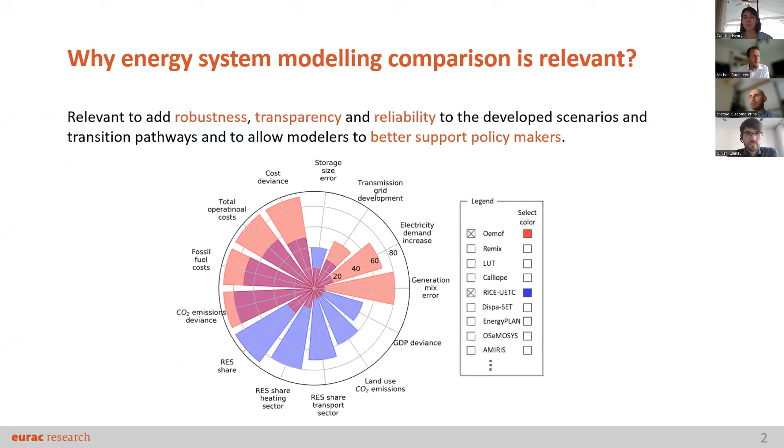So this is my presentation on classifying and comparing energy system models. Why is comparison of energy system models relevant? It is important to add robustness, transparency, and reliability to the results of the modeling, and in this way to better support policymakers. Before starting, I would like to give some definitions which I will use during this presentation.

The first is about the word framework. I will use the word framework to describe a modeling environment with a general formulation which is replicable under different assumptions and input data, and which is characterized by certain mathematical formulation and structural boundaries. A model, an energy system model, is a specific implementation of an energy modeling framework. A scenario result is the result of an energy system model run.

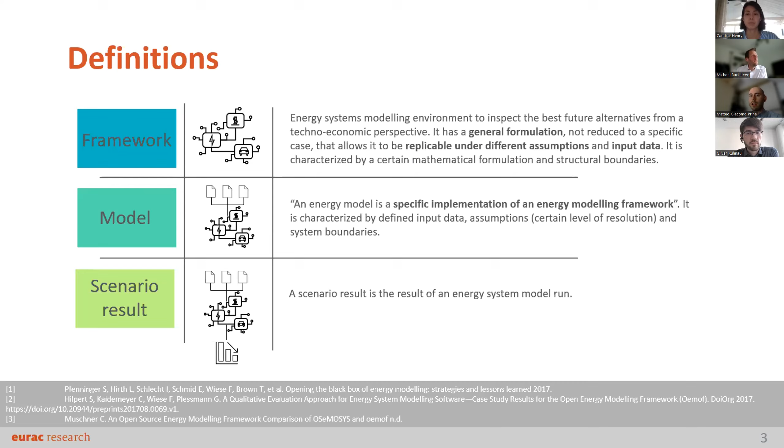Yeah, the slides and the material that I'm going to present are from two studies. The first one is about the classification and challenges of bottom-up energy system models, where the scope was to identify a classification scheme and the challenges of these kind of models based on a qualitative approach.

So talking about the different comparison approaches, we have seen the qualitative approach, which is basically, as I said before, based on the comparison of the theoretical characteristics and features, while the quantitative approach is, of course, mostly focused on the results of each framework, model, or scenario. And usually a different set of indicators is used to analyze these final results.

And these indicators can be classified in different areas and categories. And we have done this classification in this work. I don't have so much time now to go into detail of all these indicators, but we try to propose a scheme in order to make this classification easier.

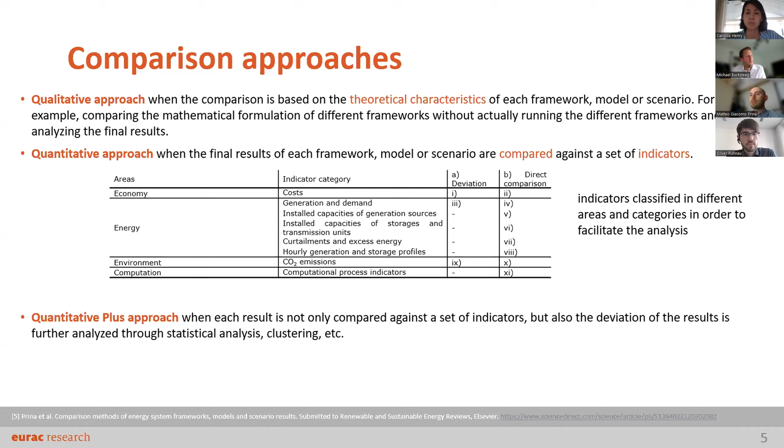And then looking at the literature, we have also identified an additional approach which we called quantitative plus approach, where each result is not only compared against a set of different indicators, but also the deviation of the results is further analyzed through statistical analysis, clustering, and so on.

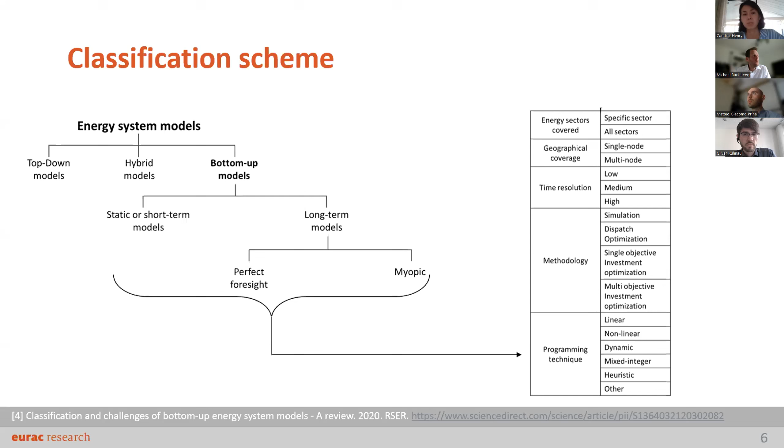So talking about the first study, the qualitative approach for comparison of energy system models, of course, there are many categories and features that can be identified in this regard. So, for example, we have the general approach, the static short-term models versus long-term models, the energy sectors covered, the geographical coverage, the temporal resolution, the methodology and programming technique, and all the different categories and definitions through which it's possible to classify this kind of models.

And in the same article, we have also looked at the challenges of energy system models, and we have identified one which is, from our perspective, very important, which revolves around the concept of resolution, and we have identified different fields. So the resolution in time, in space, in techno-economic detail, and sector coupling. And we have also defined different levels for this kind of resolution, concluding in that article that one of the challenges of energy system models is to reach high resolution simultaneously in all these fields.

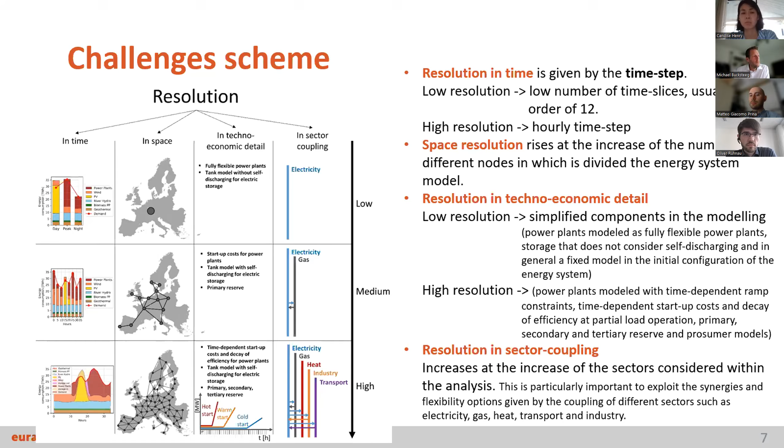So if we look at the harmonization required in the three categories, we have that in the first one, in the comparison of models, we have the highest degree of harmonization because we have the same input data and also the same mathematical formulation. In the comparison of frameworks, we have the same input data, but we have different mathematical formulation. And in the comparison of scenario results, we have different input data and different mathematical formulations.

So the results of the comparison are useful to inspect which aspects? In the comparison of models, mainly this kind of technique is applied in order to inspect the impact of the resolution. In the comparison of frameworks it is mainly the impact of the mathematical formulation and also to identify in the final results the commonalities and areas of disagreement, while in the comparison of scenarios it is mainly the common elements and areas of disagreement of the final results.

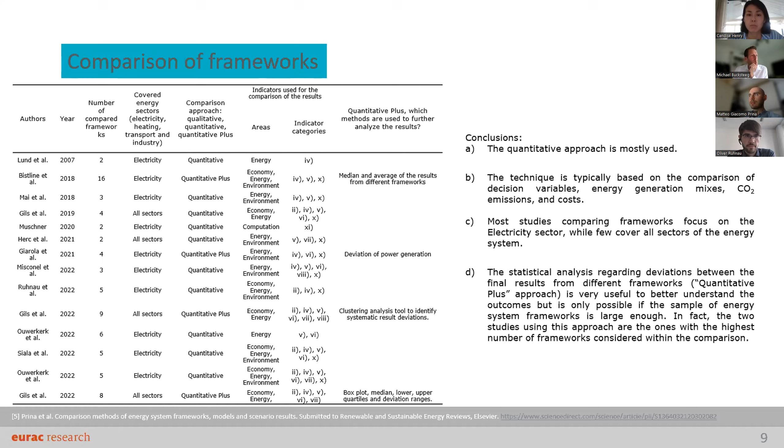But I don't have time to go into detail of this table, so I would like to focus on the comparison of models. So in this case, we have identified that the most used indicators are in the area of energy and the economy, while less used are in the area of environment and computation. And the most used indicator is the cost deviation, followed by the generation and demand direct comparison, and then the cost direct comparison, and so on.

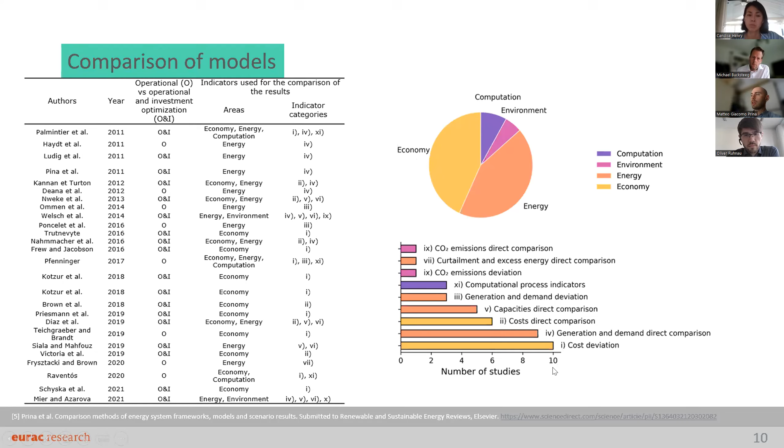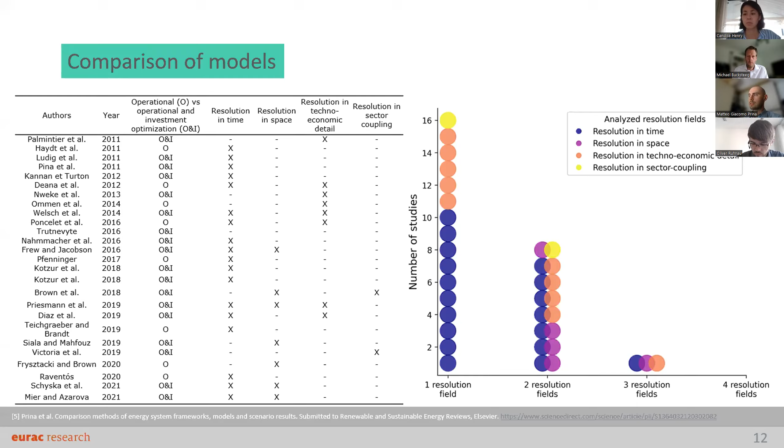So I come to the conclusions. Through these two review studies, we have tried to identify the techniques used by researchers to compare energy system frameworks, models, and scenario results with a qualitative and quantitative approach. And then we focused mostly on comparison of models, and we have seen that the most used indicators are the cost deviation, the generation and demand deviation, and simple comparison. We have also seen that the comparison of models is mostly used to test a certain resolution, and the most tested is the temporal resolution.

However, no study explores simultaneously the 4 resolution fields, so in time, in space, in techno-economic detail, and sector coupling. And this is very important to understand what are the benefits in terms of computational time, for example, of decreasing a certain resolution, and the impact on the accuracy of the final results.

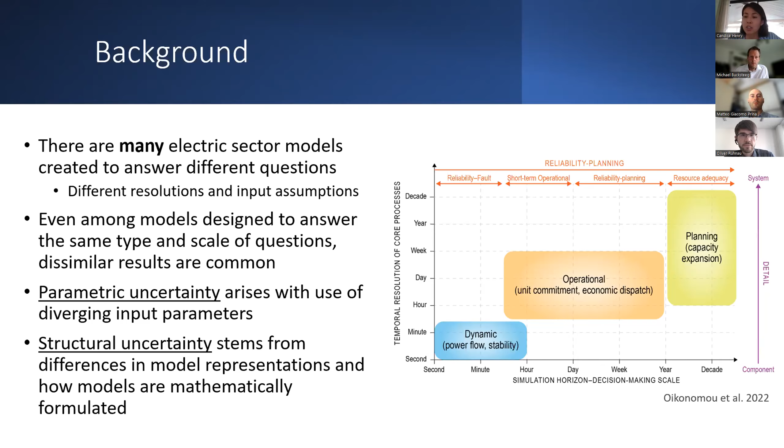So in terms of capacity expansion models, previous model intercomparison / benchmarking efforts have been unable to fully disentangle parametric from structural uncertainty. This is primarily because these models are large and complex, and it's incredibly time intensive to be able to disentangle why there are differences between models. But we would argue that understanding these differences is extremely helpful, because they help us more fully understand why there are different results across similar models.

So the objective of this specific paper that I'm presenting here is to use highly simplified scenarios across four capacity expansion models of the United States to demonstrate the type of knowledge that we can gain from model benchmarking. So for example, what types of structural uncertainty exist when we eliminate all parametric uncertainty.

And the objective is not to prescribe any certain model structures as being better or more representative of real systems, but it was to initiate discussion among the modeling team about why modelers made certain choices about model implementation, and to kind of get the ball rolling on more efforts in this space, and to share why we think this is a really important effort.

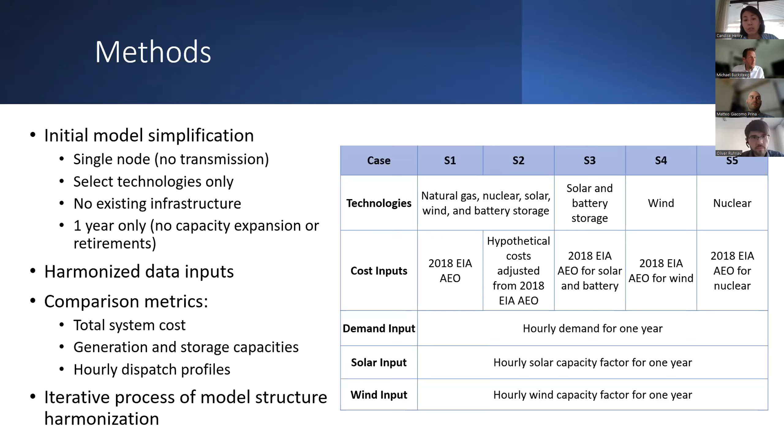And what we found, some of the differences that were really interesting that we weren't expecting across the models were, the specification of various technologies as baseload or load following generation played an interesting role. So nuclear, if it is run as dispatch, you ended up building a lot less of it than if you specify that it must be baseload.

Constraints on the state of charge of storage at the beginning versus the end of the model period also made a difference. So in some of the models, they specified that the battery must be at 0 charge at the beginning of the model run, as well as at the end of the model run. And what that meant was that it required more time to charge up in the initial hours of the model run, and that ended up resulting in different battery capacity than the models that didn't specify this constraint.

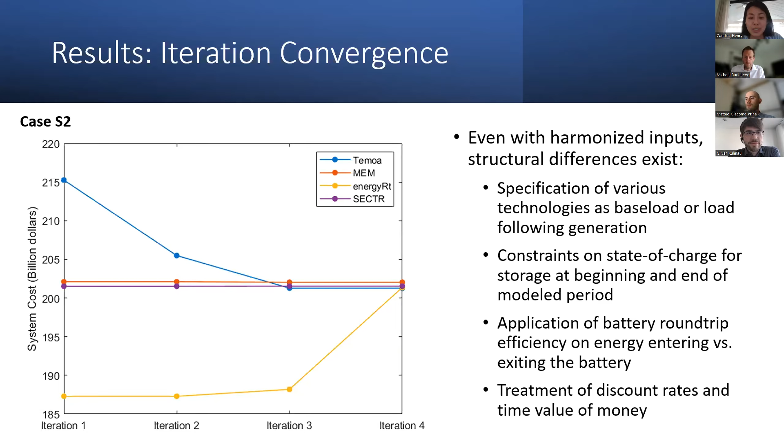And then the second potential difference is that, very surprisingly, the precision with which model parameters were specified can create differences, especially in knife edge cases. So in case S2, which I was saying was the case that we created to really let every technology get dispatched at some point, we saw a really dramatic manifestation of this. So we ran case S2 in just one model with 3 levels of rounding precision, with cost parameters at float precision, at 4 decimal places and rounded to 2 decimal places.

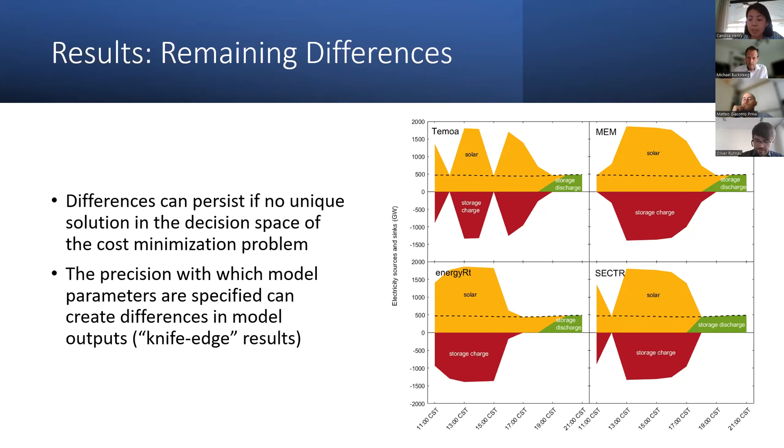Okay, so to conclude, what I would say is the main things we found were, of course, both parametric and structural differences can contribute to divergences in model results. But this isn't a bad thing. The modeling community can increase confidence in modeling results through a more systematic analysis of these differences between models via a community-wide model benchmarking effort.

So we are really pushing for more groups to benchmark their models to really understand why there are differences. And of course, reporting of uncertainties through sensitivity analyses. This doesn't happen super frequently, I would say, in the modeling community, where we report a lot of sensitivity runs in our papers. And so that is, I think, something that would be helpful as well.

I will say, of course, benchmarking will be much more difficult for more complex models than what we did here. But we believe that breaking comparisons down into smaller cases, like unit testing in programming, can make this a lot more approachable. And then I'll end with something that I've said the whole time, but I'll keep reiterating.

Differences in model outputs, if adequately documented and explained, can be an asset to the broader energy community because they reflect real differences of opinion between model users about cost projections, technological assumptions, and more. So we're not trying to say that all of our models should be the same, but it's important to understand why they differ. And with that, I will conclude.